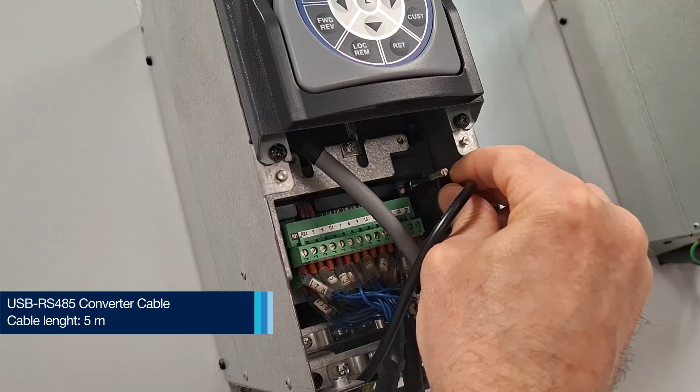And now let's proceed with the commissioning of the ADV200 drive using the WEG Express software and our laptop. In order to connect the drive to the laptop, you may use a cable that you may order from WEG that converts the RS485 interface on the drive with a USB interface you can use directly on your laptop.

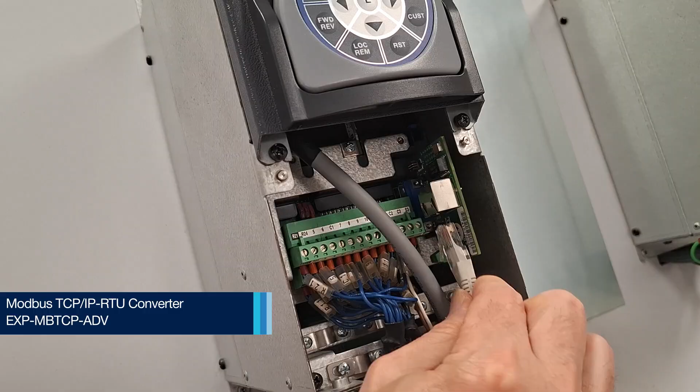You may use another option that is a Modbus RTU TCP converter converting the sub-D connector directly on the drive with an RJ45 in order to connect a standard Ethernet cable. In order to perform the commissioning, we need to switch on the drive. Now, let's proceed to launch the software WEG Express from the desktop shortcut the installation created.

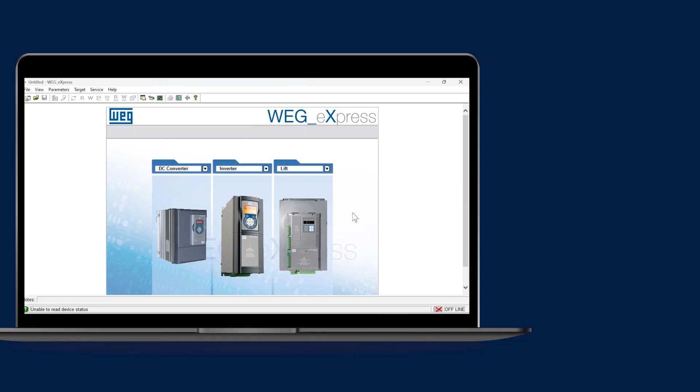When the software is launched for the first time, this is the screen that will appear. The software will expect the user to choose which drive the user wants to connect to. The choices are between DC converters, inverters, or lift drives. In this case, we will open the list of inverters.

There are two types of ADV200 in the list. The one called ADV200 is meant to be used with asynchronous motors. The one with the S in the end is meant to be used for synchronous motors. In this case, we have an asynchronous motor, so we will go for the first choice.

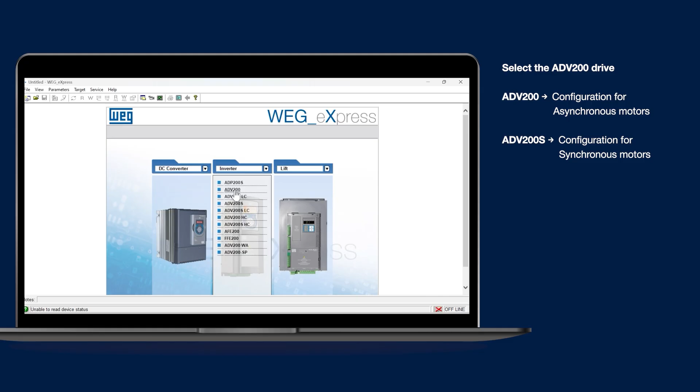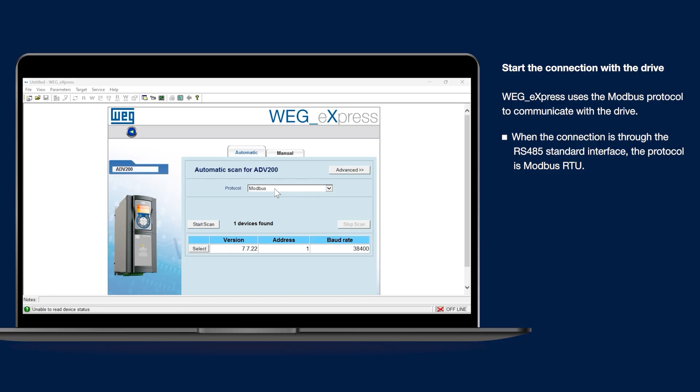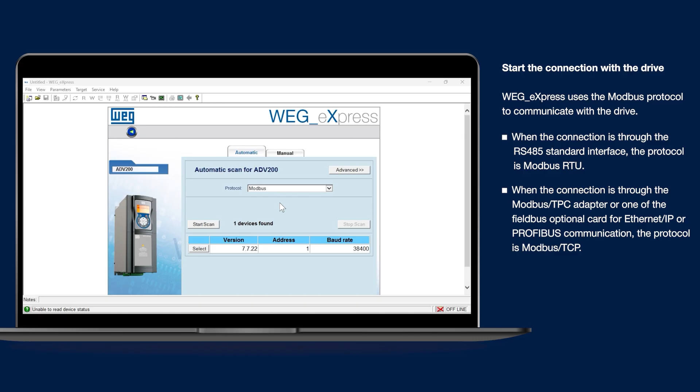WEG Express uses the Modbus protocol to communicate with the drive. If you are connected through the serial interface, it will be Modbus RTU. If you're using the specific converter or one of the new communication boards for PROFIBUS or Ethernet IP, it will communicate through Modbus TCP protocol. In this case, the drive is connected through the RS485 serial interface, so the software is automatically scanning the communication port and found the drive.

As you see, the software is showing which firmware version the drive has, the address of the drive, and the baud rate. If the software is not finding the drive, you can access the advanced settings and change the communication information in order to find the drive correctly. You can also access the manual settings in order to select manually which drive the software should connect to.

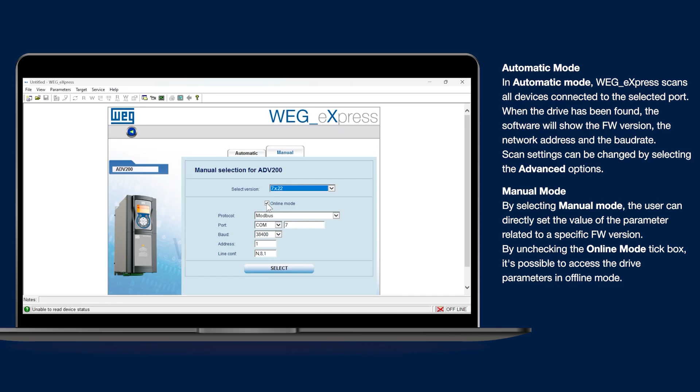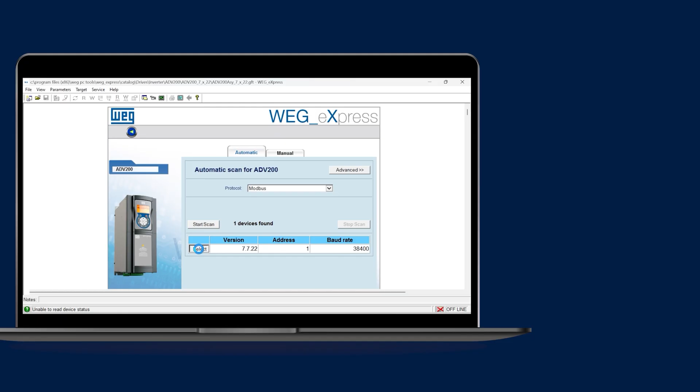And you can even unclick the online mode in order to use the software offline. This may be useful to access the parameter list and all the settings and eventually configure the Modbus TCP communication. Now we will select the drive that the software found scanning the communication interface, and we will go online with it. As you can see on the bottom right corner of the window, we are now connected and we are online with the drive. We can proceed with the wizard, that is the guided configuration of the drive.

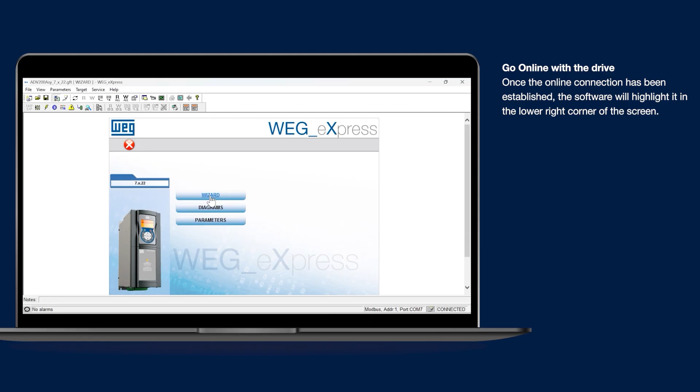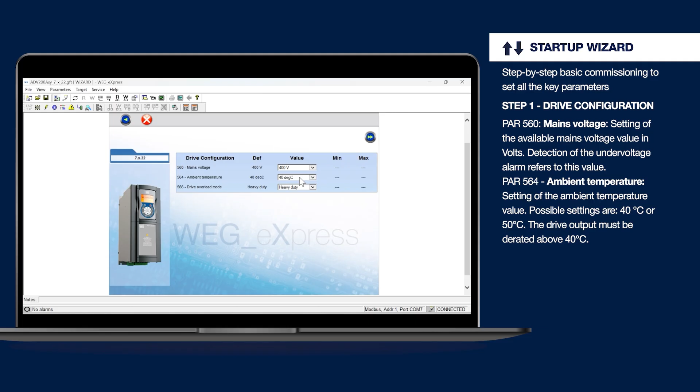The first step that the wizard is going through is the setting of the drive configuration. As you see, there are some parameters which can eventually be changed in case the mains voltage is different from 400 volt, or the ambient temperature is different from the maximum ambient temperature the drive expects to be in, or the overload mode should be changed from heavy to light. In this case, we will leave all these settings with the standard values. Let's proceed to the second step.

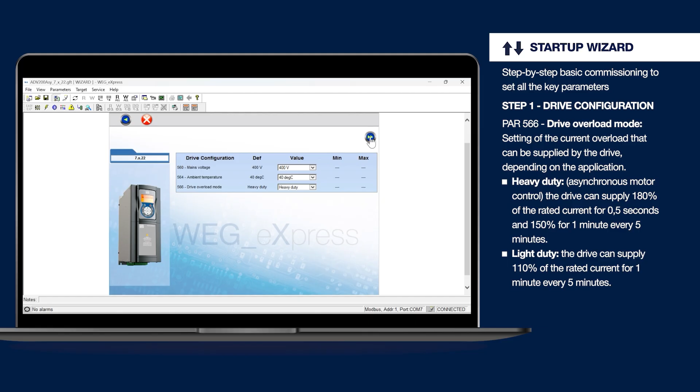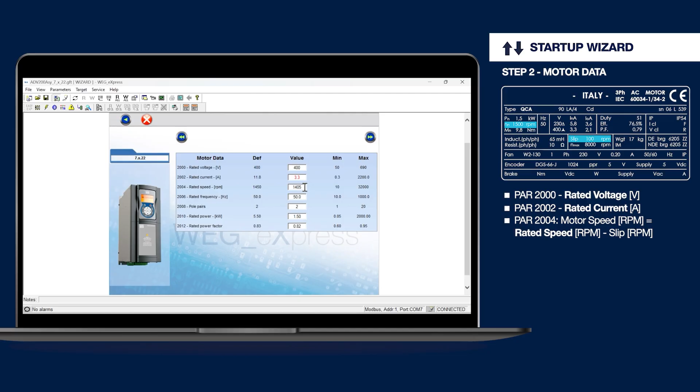Moving forward, the software will ask us for the information about the motor. The rated data of the motor are shown in the picture here on the screen. We need to input the information into the wizard page. The rated voltage is correct. The rated current is 3.3. The rated speed, since the slip is 100 RPM and the nominal speed of the motor is 1,500 RPM, is 1,400. The frequency is correct.

The number of poles, in this case the software is asking for pole pairs, is correct. The motor has 4 poles. The rated power is correct, but the power factor must be changed. As you see, the software is showing that these parameters have been changed from default, since they are now in red. Let's move to the next step.

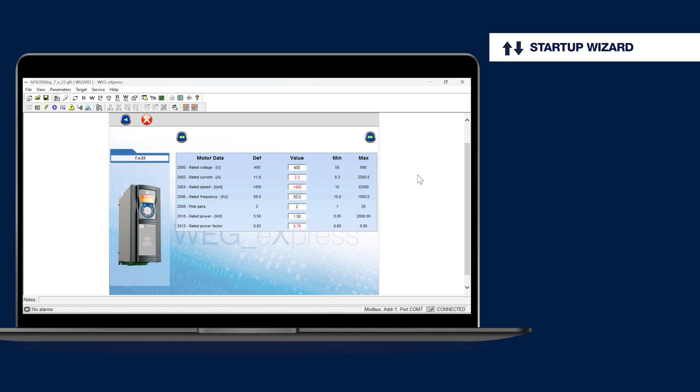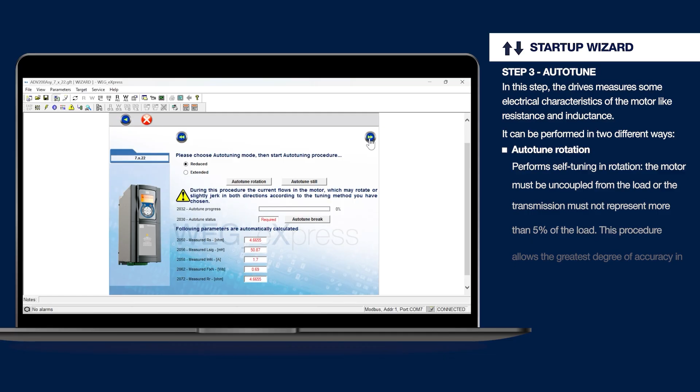The next step is the autotune procedure. We can perform the autotune rotating the shaft of the motor, or in case the load is already connected to the motor, we should go for the autotune still, that is measuring information from the motor without moving it. Since we don't have any load connected, we will go for the autotune rotation.

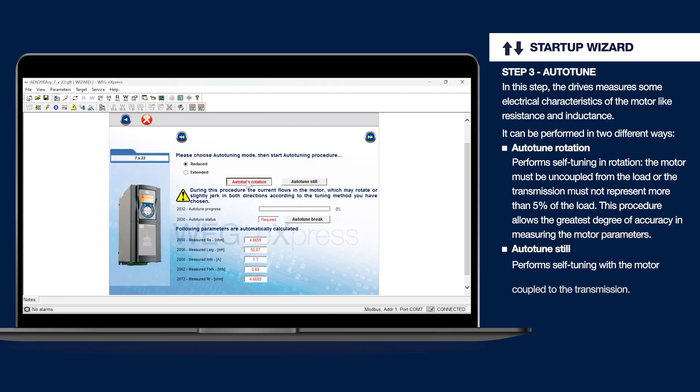As soon as we try to start the autotune process, the software will inform us that we need to close the enable hardware to the drive in order to proceed. As you may remember, the digital input 7 is the enable hardware that has to be closed before moving the motor. Let's do that.

Now we can proceed. While the AUTOTUNE is proceeding, the software will show us the progress in the progress bar. During this procedure, the drive is turning the motor shaft, measuring the electrical data that will be populated in the screen as soon as the process is over. Now the progress bar has reached 100% and the correct values have been calculated. We can move to the next step.

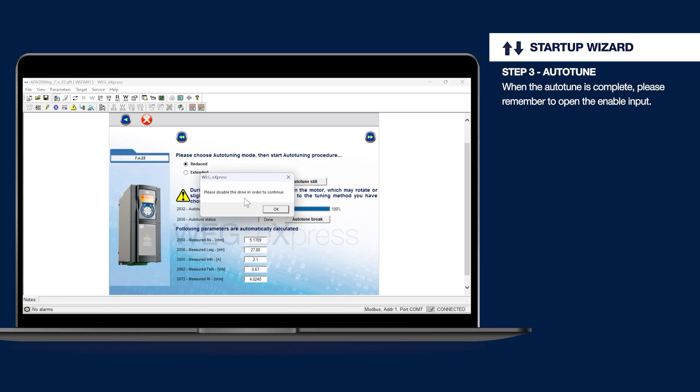The software is reminding us that the drive is still enabled, so before proceeding, we need to open the digital input 7 to the drive. In this screen, we can set the regulation mode of the drive. The default value is V/f control, but it can be changed to flux vector control, open loop, or closed loop. We will leave it to the default value,

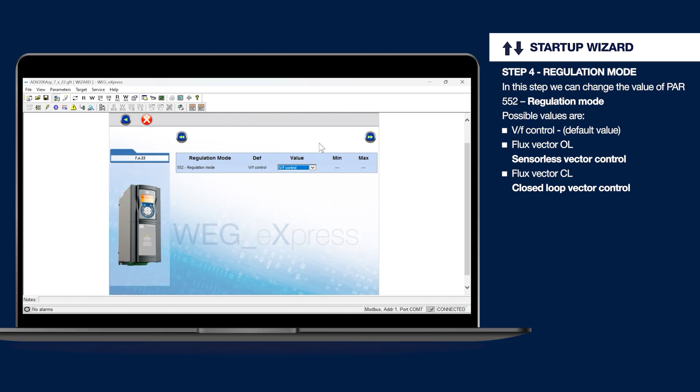voltage on frequency. The next page is showing the speed limits, high and low, the overspeed threshold, and the full scale speed, that is, the value of the motor speed in RPMs corresponding to 100% of the scale. We will leave these at the default values.

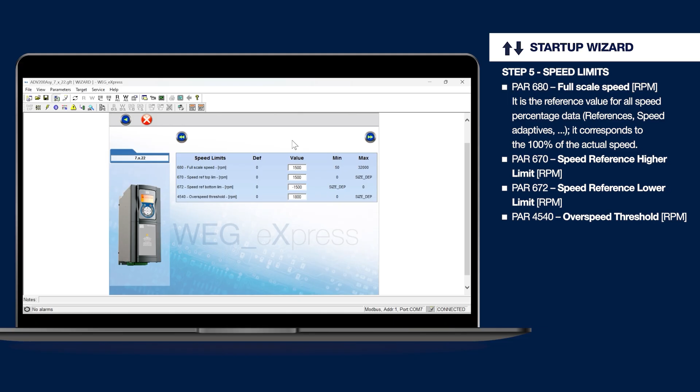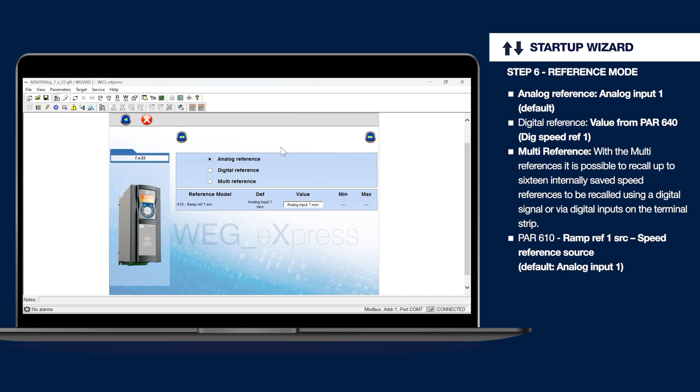The next page is used to decide the source of the speed set point. Again, we will leave it to the standard value so that eventually we can provide the speed reference through the analog input 1 connected in the control box to a potentiometer. Let's move to the next step.

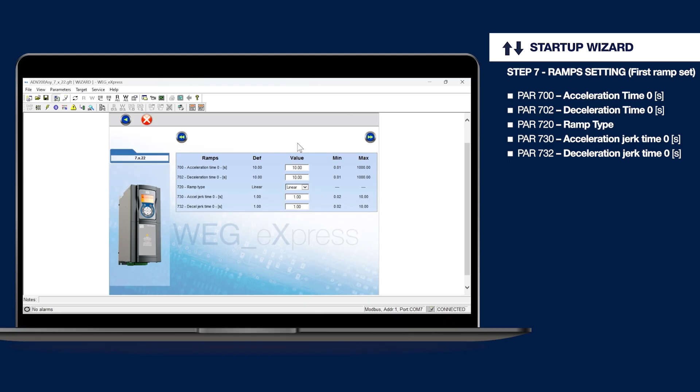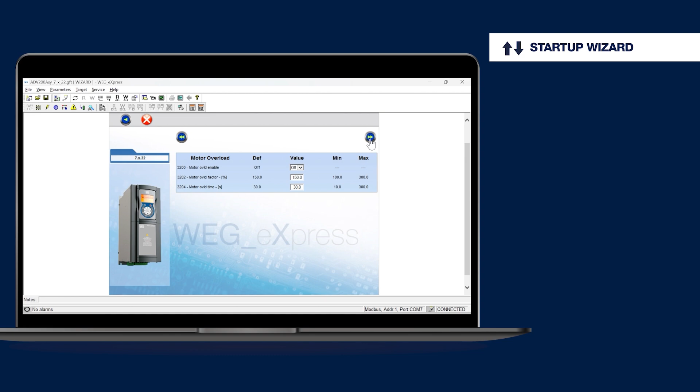In the screen, we can change the acceleration and deceleration time of the drive, so the changes to the reference that we can set. We will skip the motor potentiometer settings since we are not using it, as well as the jog function. In this page, we can enable the overload to the motor with the values that we see here in the same page. We will leave it to default.

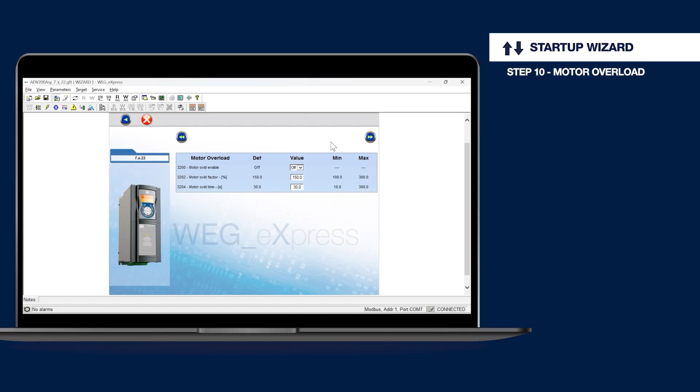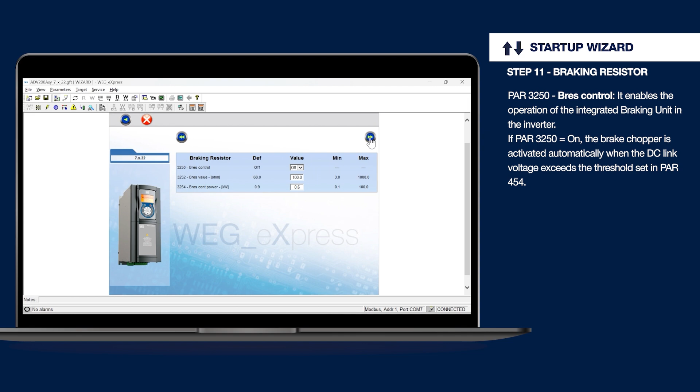Moving forward, we can inform the drive that we are going to use a braking resistor for dissipating the regenerative energy that may come back from the motor to the drive in case of fast braking of the motor or high inertial load. This was the last setting. Now we suggest you save the parameters in order to ensure they are not lost in case of a power loss or when you switch off the drive. The parameters have been successfully saved.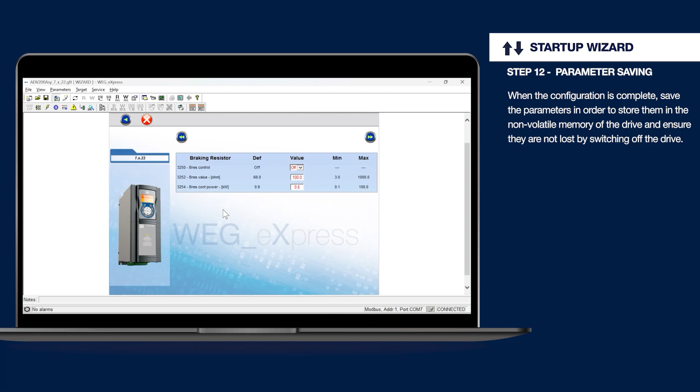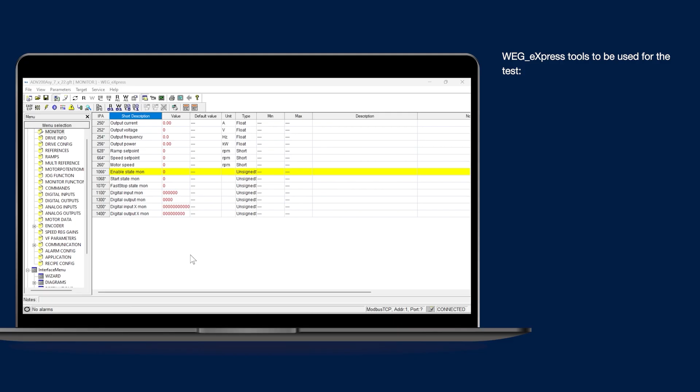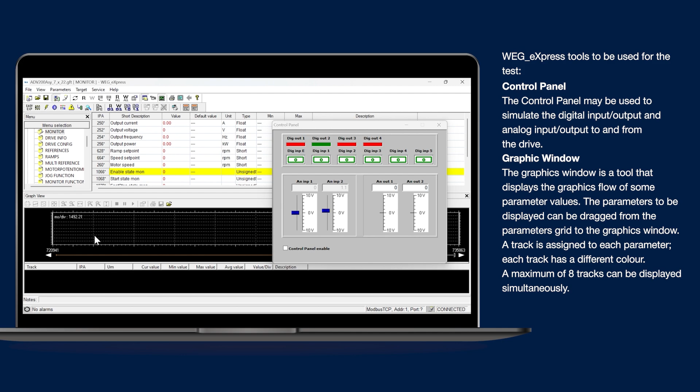Now that we have completed the initial setup of the drive, we can test if the motor is running correctly and the drive has been configured in the right way. To do that, we can use some software tools that WEG_eXpress has and are very useful for this purpose. In particular, the control panel, which is a simulator of digital inputs and analog inputs to the drive, and the graphical window, where we can view in a graphical way how different values are changing.

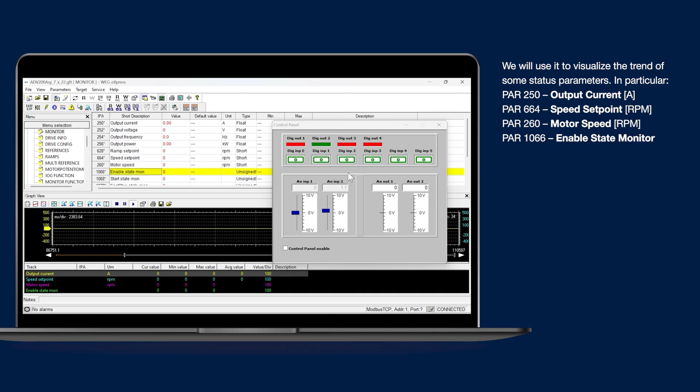In particular, we want to observe the output current. As you see, we can just drag and drop the information into the window. We will have a look at the speed set point, the motor speed, and the state of the enable command. We want to see all the values. In order to use the control panel, we need to enable it. Now we can give commands to the drive.

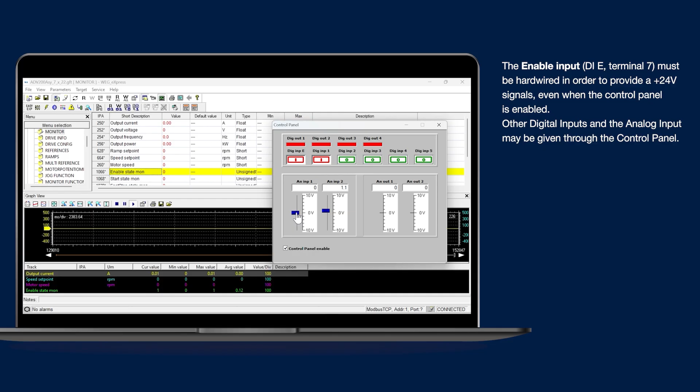As you may remember, the digital input E is a hardware enable. So before moving forward, we need to give it in a hardware way to the drive, closing the terminal 7. Now we can simulate the digital input 1 with the software control panel in order to give the drive enable, and we can change the speed reference, as you can see in the graphical window.

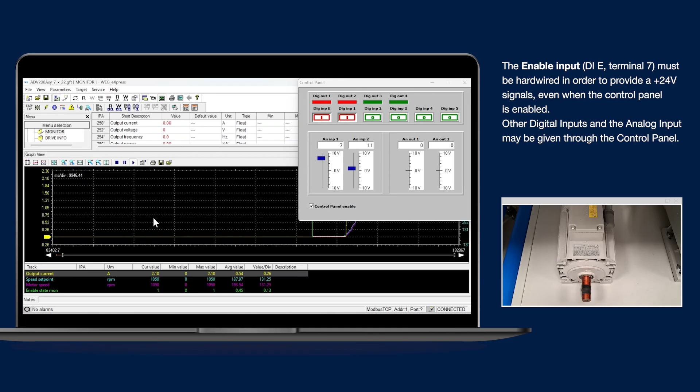We are adjusting the view in order to see the values for a longer time, so it's easy to detect the change of the enable signal and the moment we are applying the speed reference to the drive and the motor is turning. We can take off the enable and the drive will stop. We are now going to remove the hardware enable. And we can remove the enable from the control panel.

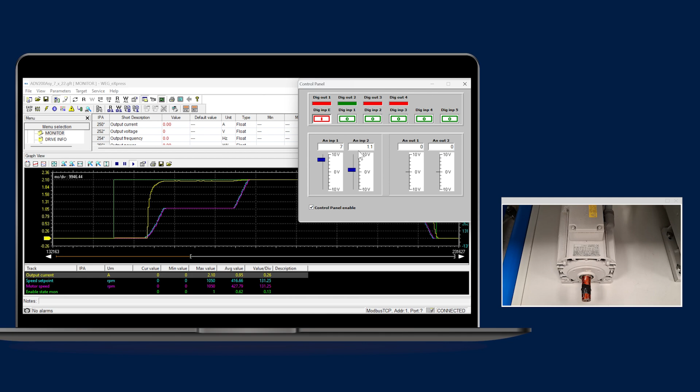We have reached the end of this tutorial about the commissioning of the ADV200 AC drive. Please consider that all the information about the installation and parameterization of the drive may be found in the manuals you may download from the WEG website.